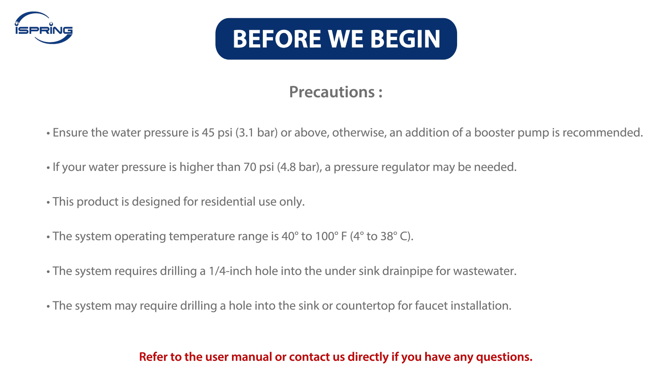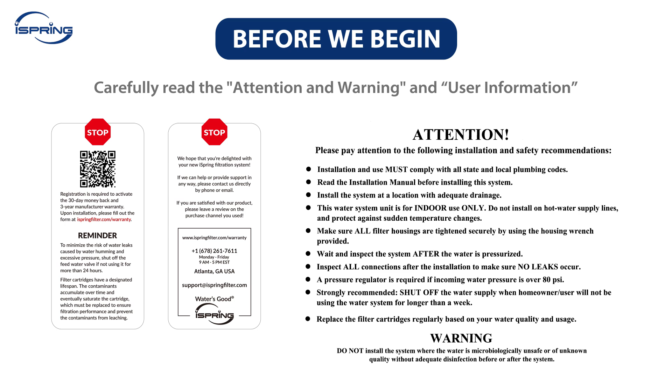The system requires drilling a 1/4-inch hole into the under-sink drain pipe for wastewater. The system may require drilling a hole into the sink or countertop for faucet installation. Carefully read the attention and warning notice on the system packaging and the user information section of the user manual. Check that all parts were included in the package and have all the required tools ready.

Installation: Feed water adapter.

The iSpring RCC series RO systems are designed for under-sink water use. Please clean out the space under the sink before installation. The feed water adapter fits standard 1/2-inch and 3/8-inch connectors. If you have a different size fitting, you will need a converter.

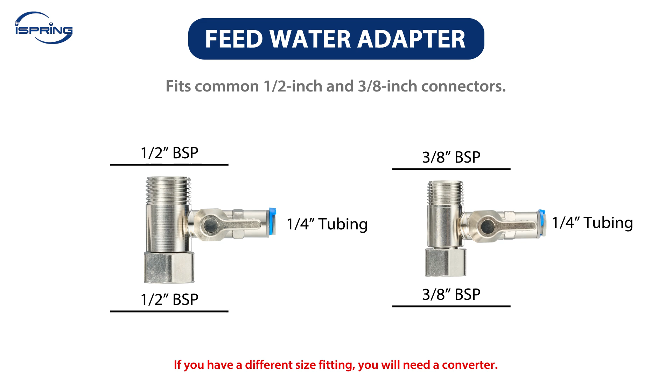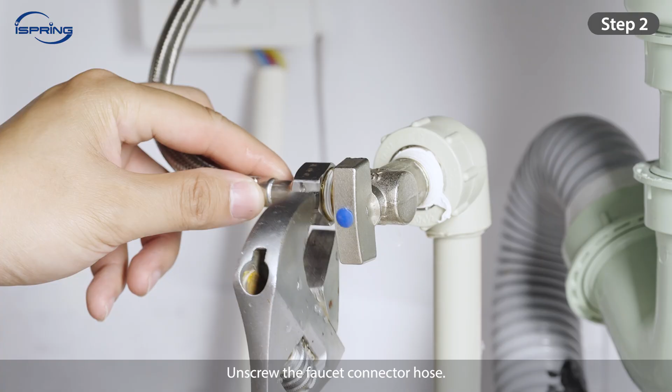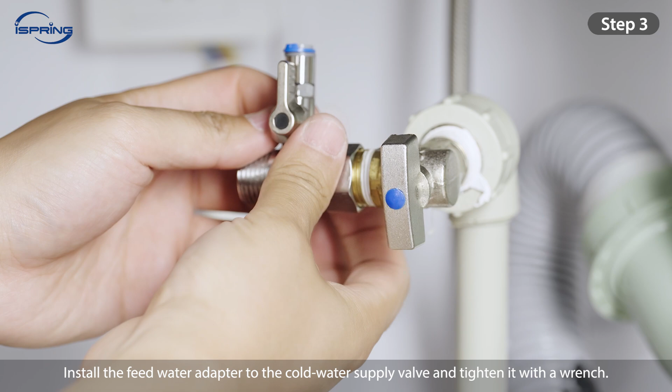Step 1. Turn off the cold water supply valve under the sink and turn on the faucet to drain any air and water in the connector hose. Step 2. Unscrew the faucet connector hose. Be prepared to catch any excess water from the hose with a towel. Step 3. Ensure the O-ring is seated properly inside the adapter to prevent leaks. Install the feed water adapter to the cold water supply valve and tighten it with a wrench.

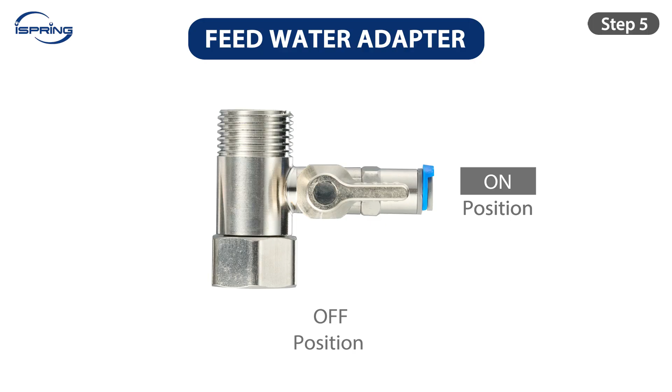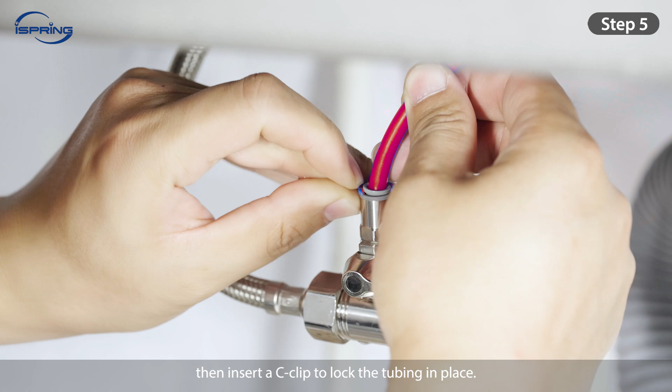Step 4. Reinstall the faucet connector hose to the feed water adapter and tighten it with a wrench. Step 5. Turn the feed water valve to the off position. Insert the red tubing 1/2 inch deep into the quick connect fitting, then insert a C-clip to lock the tubing in place. Measure and cut the tube.

Installation: Drain saddle.

Step 1. Choose a spot on the drain pipe that is convenient for installing the drain saddle and tubing. A horizontal pipe is recommended to minimize the dripping sound.

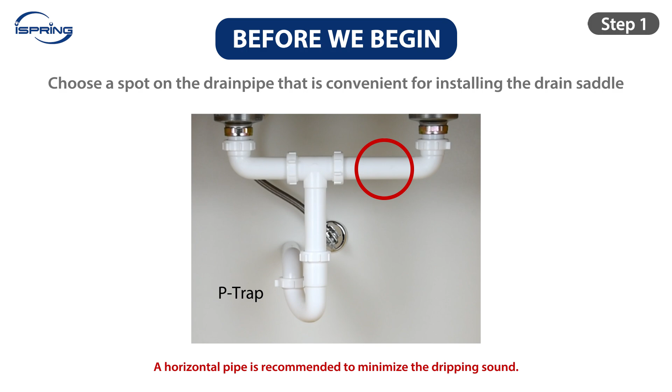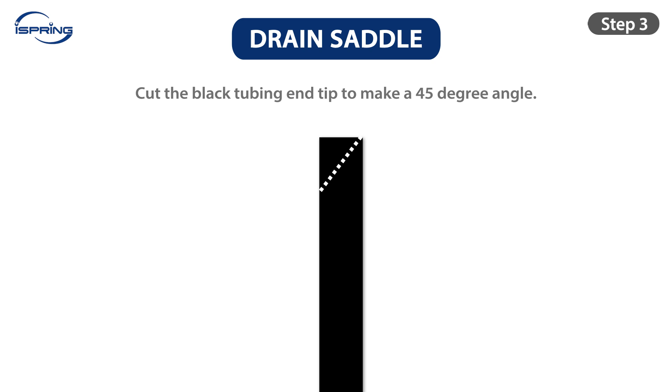Step 2. Drill a 1/4-inch hole into the drain pipe. Paste the seal pad around the hole to prevent leaks. Step 3. Cut the end of the black tubing tip at a 45-degree angle. Insert the tubing through the drain saddle into the drain pipe.

Step 4. Install the back plate and tighten the 2 screws with hex nuts while the tubing remains in the hole. Pull the tubing lightly to make sure it is secure.

Installation: RO drinking faucet. Option 1. Bottom mount kit. Choose a suitable flat surface on the sink or countertop to install the drinking faucet. If your kitchen sink does not have a pre-existing hole, you will need to drill a hole.

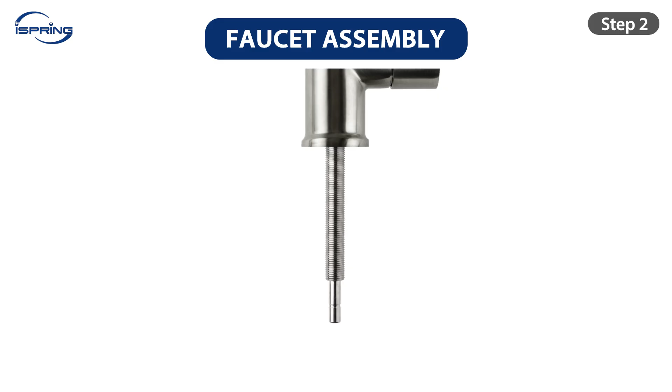1/2 inch to 1.5 inch diameter. Step 1. Clean and dry the sinkhole area. Step 2. Insert the front plate and then the rubber washer into the faucet base. Step 3. Insert the faucet into the sinkhole. Step 4. From under the sink, insert the rubber washer, followed by the wing nut, into the faucet stem. Tighten the wing nut to secure the faucet.

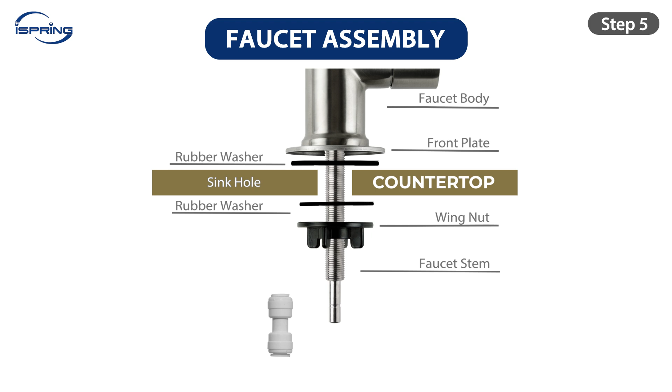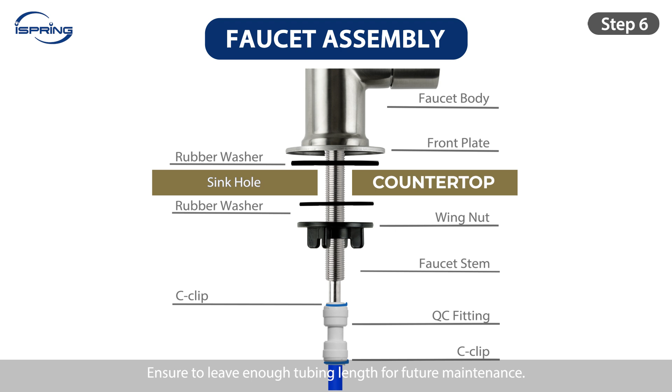Step 5. Insert the blue tubing into the quick connect fitting 1/2 inch deep, then insert a C-clip to secure the tubing in place. Step 6. Connect the quick connect fitting to the faucet stem. Secure the fitting with a C-clip. Measure and cut the tubing. Ensure that you leave enough tubing length for future maintenance.

Installation: RO drinking faucet. Option 2. Top mount kit. A top mount installation kit allows for the installation of a standard drinking faucet on the countertop without the need to reach under the sink. It is designed to save time and hassle. Please note that the top mount kit requires a 3/4 inch to 1 1/4 inch faucet hole.

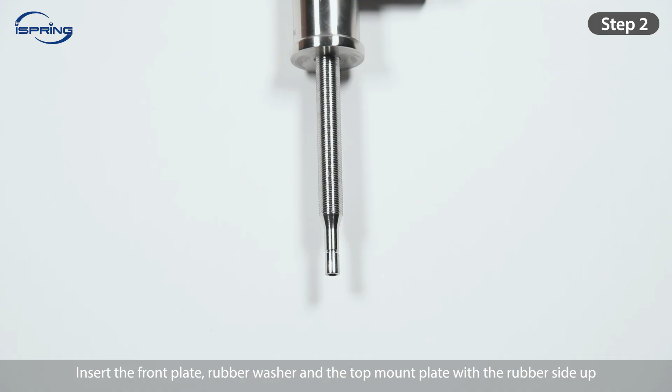Step 1. Clean and dry the area. Step 2. Insert the front plate, the rubber washer, and the top mount plate with the rubber side up into the faucet base. Step 3. Install the metal nut to the faucet stem below the plate.

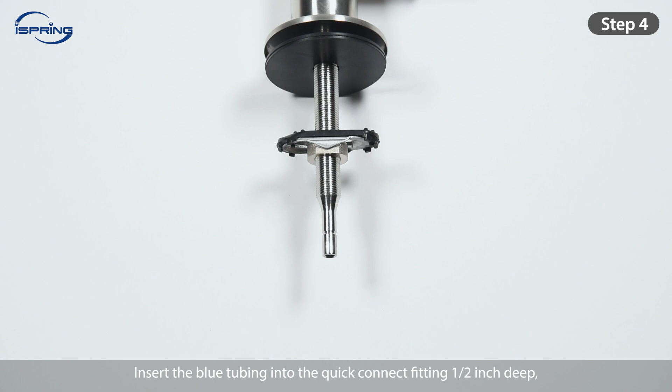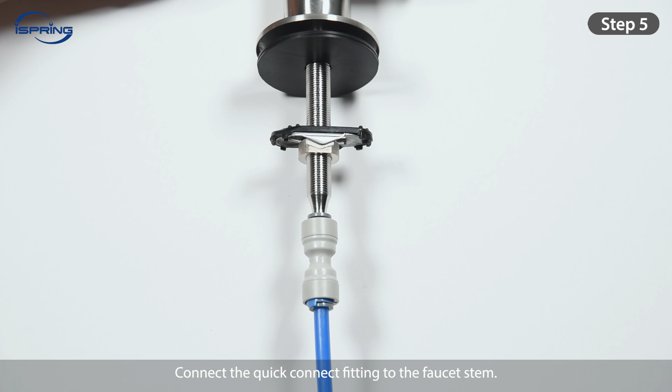Step 4. Insert the blue tubing into the quick connect fitting 1/2 inch deep, then insert a C-clip to secure the tubing in place. Step 5. Connect the quick connect fitting to the faucet stem. Secure the fitting with a C-clip.

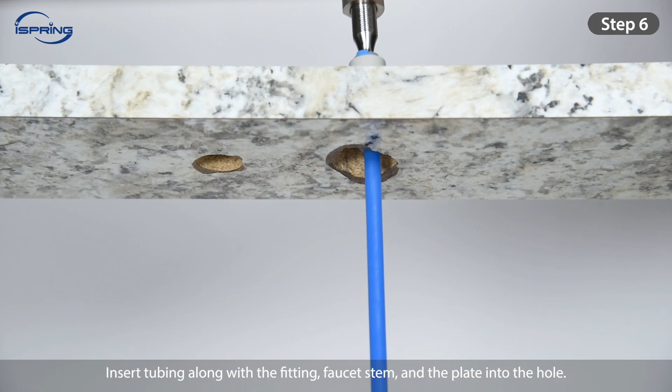Step 6. Lift and tilt the plate. Insert tubing along with the fitting, faucet stem, and plate into the hole. Let go of the plate. It will drop and latch onto the metal nut via the triangular grooves on both sides.

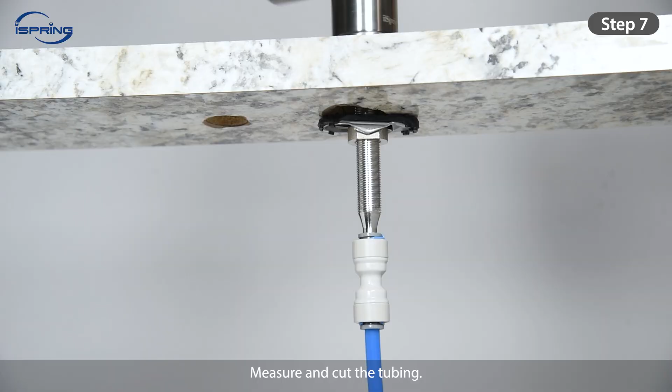Step 7. Lift the faucet body to secure the plate and nut. Tighten the faucet by turning it clockwise. Measure and cut the tubing. Ensure that you leave enough tubing length for future maintenance.

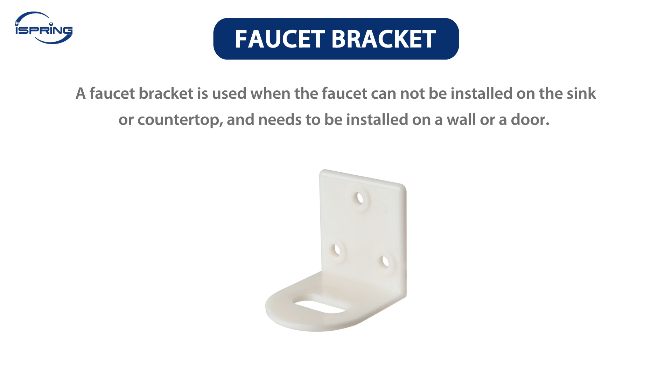Installation: RO drinking faucet. Option 3. Faucet bracket. A faucet bracket is used when the faucet cannot be installed on the sink or countertop and needs to be installed on a wall or a door.

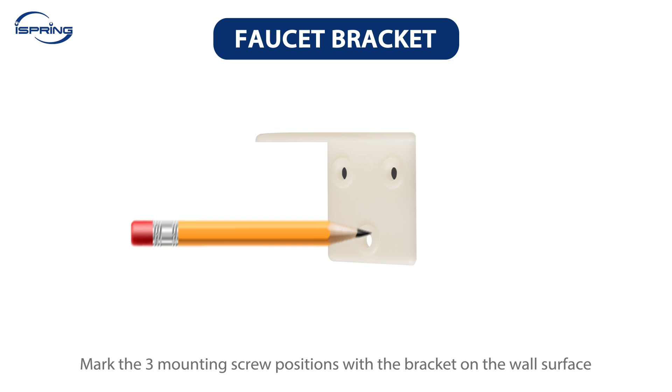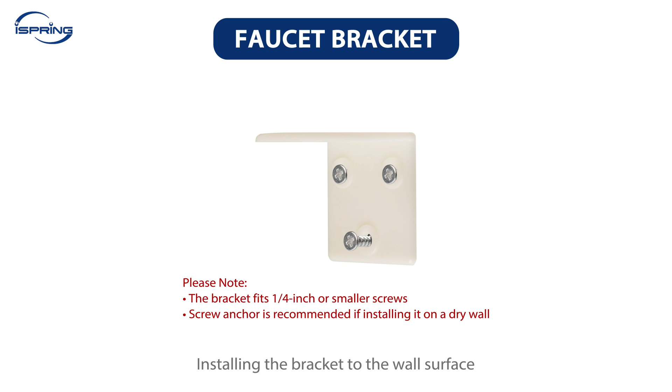To install the bracket, first find the desired location. Then mark the 3 mounting screw positions with the bracket on the wall surface. Pre-drill the marked holes with a smaller drill bit, followed by installing the bracket to the surface with mounting screws. Please note the bracket fits 1/4 inch or smaller screws, and a screw anchor is recommended if installing it on a drywall.

Ensure the bracket is steady and install the faucet to the bracket, followed by the faucet installation instructions.

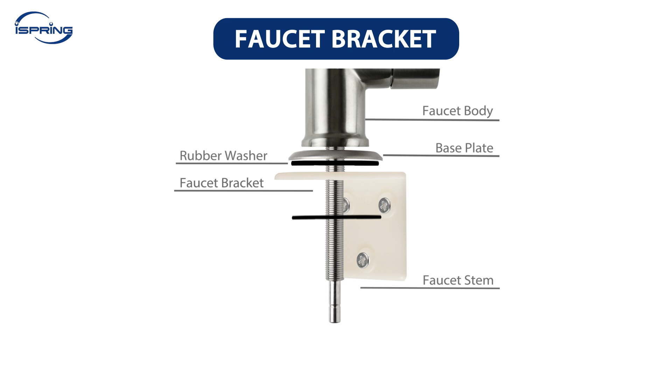Installation: water storage tank.

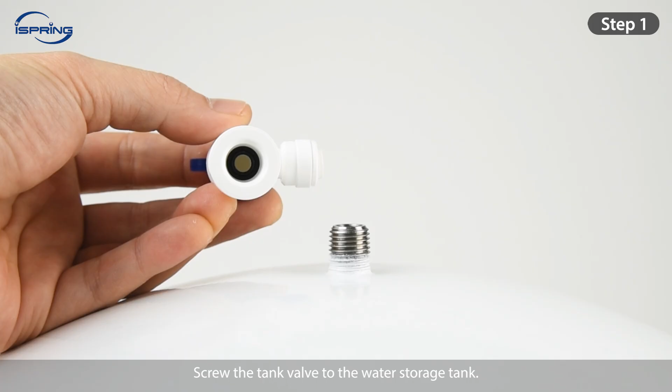Step 1. Screw the tank valve to the water storage tank. Ensure the O-ring is seated correctly inside the tank valve to prevent leaks. Step 2. Insert the yellow tubing 1/2 inch deep into the tank valve. Insert a C-clip to secure the tubing in place. Ensure the tank valve is in the closed position.

Installation: reverse osmosis membrane.

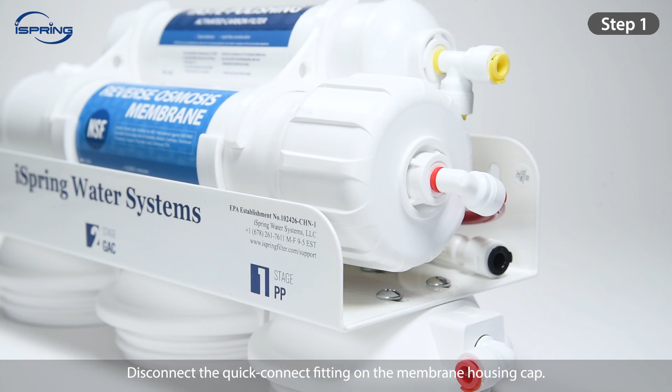Step 1. Disconnect the quick connect fitting on the membrane housing cap. Unscrew the cap by turning it counterclockwise using the housing wrench. All systems have been tested with pressurized water flow to ensure build quality before being packed. It is normal to see a little water residue remaining in the membrane housing.

Step 2. Unwrap and insert the membrane into the housing and make sure the membrane is seated flush with the housing. Step 3. Check that the membrane housing O-ring and housing cap O-ring are seated properly. Screw the cap back onto the housing.

Use the housing wrench to tighten the cap with another 1/4 to 1/2 turn of the wrench. Do not over-tighten, as this can cause leaks and make future filter replacement difficult. Step 4. Connect the push fitting back to the membrane housing cap.

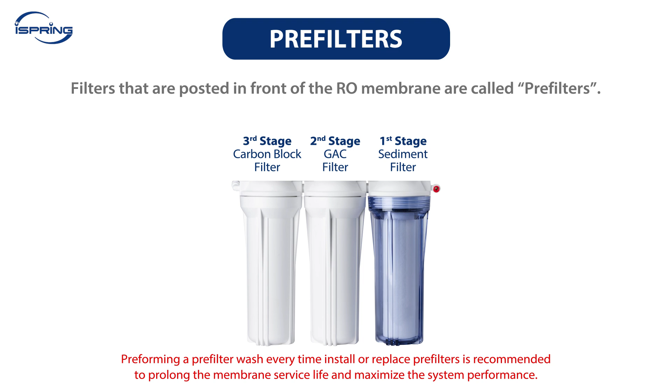Pre-filter wash. Filters posted in front of the reverse osmosis membrane are called pre-filters. We recommend performing a pre-filter wash every time you install or replace pre-filters to prolong the RO membrane service life and maximize the system performance.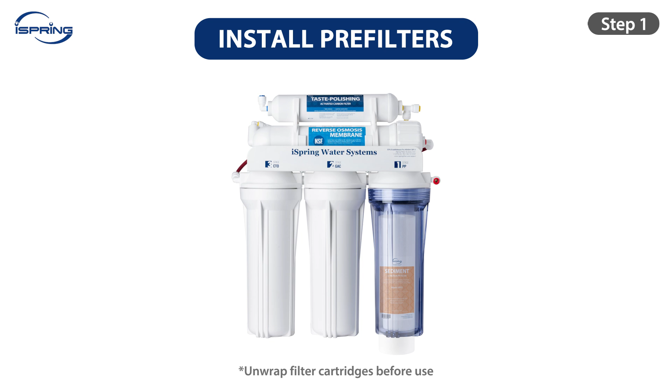Step 1. Unscrew stage 1, 2, and 3 filter housings. Take out and unwrap all the filters. Step 2. Insert the filters back into their housing and ensure the housing O-rings are properly seated to prevent leaks.

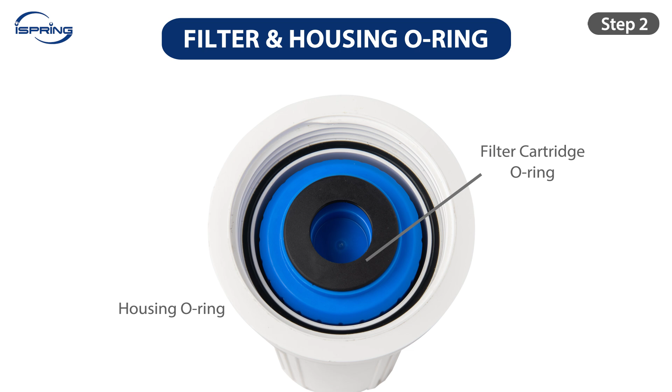Step 3. Twist the housings clockwise onto the housing caps. Use the housing wrench. Tighten the housing with another 1/4 to 1/2 of a turn. Do not over-tighten, as this can cause leaks and make future filter replacement difficult.

Step 4. Remove the C-clip and insert the red tubing from the feed water adapter to the system water inlet fitting. Lock the tubing in place by inserting the C-clip.

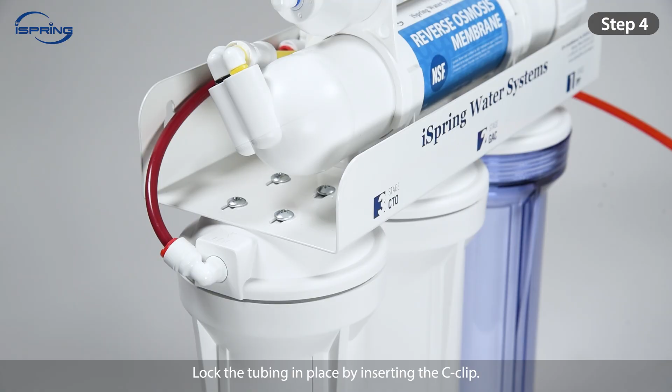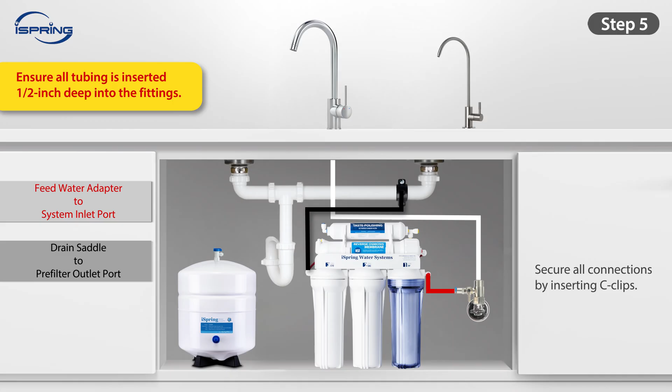Step 5. Remove the C-clip and remove the red tubing from the pre-filter water outlet. Insert the black tubing from the drain saddle to the pre-filter water outlet fitting. Ensure all tubing is inserted 1/2 inch deep into the fittings to prevent leaks.

Step 6. Turn on the cold water supply valve and slowly turn on the feed water valve. Let the water fill and flush the pre-filters for at least 5 minutes. Check and ensure that no leaks occur.

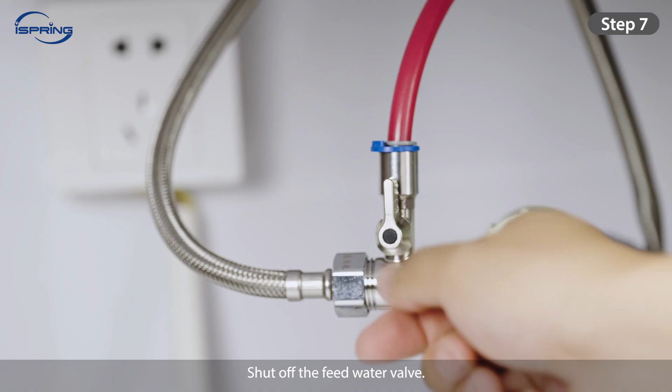Step 7. Shut off the feed water valve. The pre-filter wash is now complete.

Installation: leak stop valve. RCC series comes with a leak stop valve that can automatically shut off the inlet water from entering the water system when it detects a leak, effectively protecting your home from water damage.

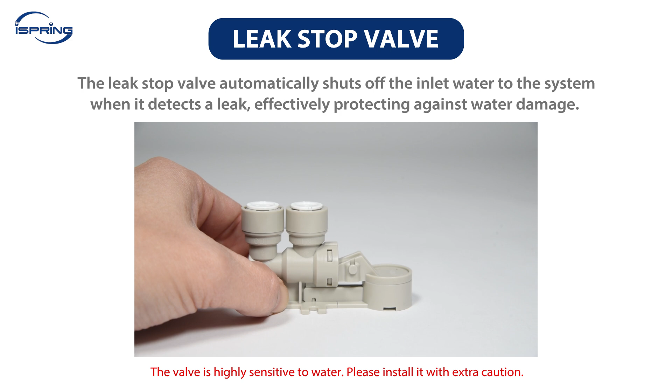The valve is highly sensitive to water. Install it with extra caution, as the leak stop pad inside the valve will easily absorb water and expand. Thus, it will need to be replaced every time it contacts with water.

Step 1. Find a dry and flat spot under the sink close to the system to place the leak stop valve. Step 2. Measure and cut the red tubing. Connect the red tubing from the feed water valve to the leak stop valve's inlet port.

Step 3. Connect the remaining red tubing from the system inlet to the leak stop valve's outlet port. Please ensure all tubes are inserted half an inch deep into the fittings.

System installation.

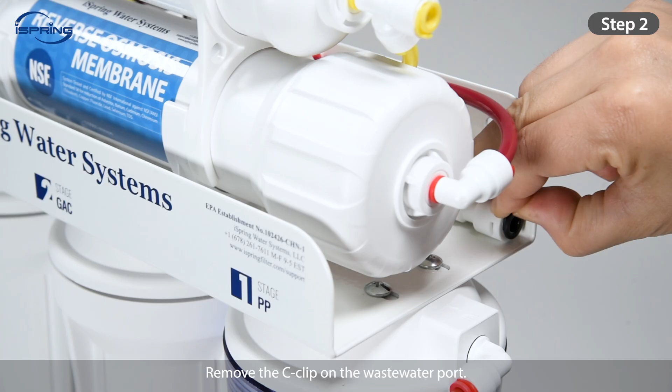Step 1. Remove the black tubing from the pre-filter water outlet fitting. Be prepared to catch the excess water from the connection with a towel. Step 2. Remove the C-clip on the wastewater port.

Connect the black tubing from the drain saddle to the system wastewater port. Insert a C-clip to secure the tubing in place.

Step 3. Connect the red tubing back to the pre-filter water outlet fitting. Insert a C-clip to secure the tubing in place.

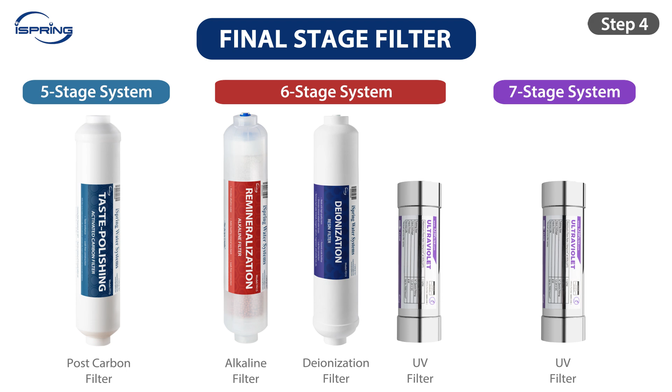Step 4. Connect the blue tubing from the drinking faucet to the final stage of your system. The final stage filter will be a post-carbon filter if you have a 5-stage system, an alkaline filter, a deionization filter, or a UV filter if you have a 6 or 7-stage system. Insert a C-clip to secure the tubing in place.

Step 5. Connect the yellow tubing from the water storage tank valve to the post-carbon filter's T-fitting. Insert a C-clip to secure the tubing in place.

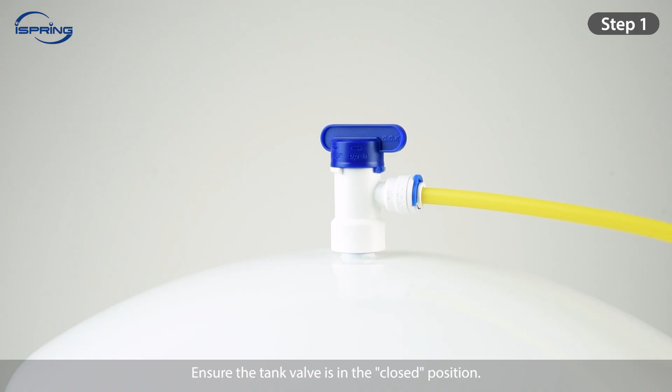Step 1. Ensure the tank valve is in the closed position. Turn on the feed water valve and check the connections for any leaks. Turn off the feed water valve and fix any leaks before moving on to the next step.

Step 2. Turn on the drinking faucet to purge out all the air. The water will start to trickle within a few minutes. Step 3. Let the water trickle for at least 10 minutes to drain any residual materials from the membrane and filters.

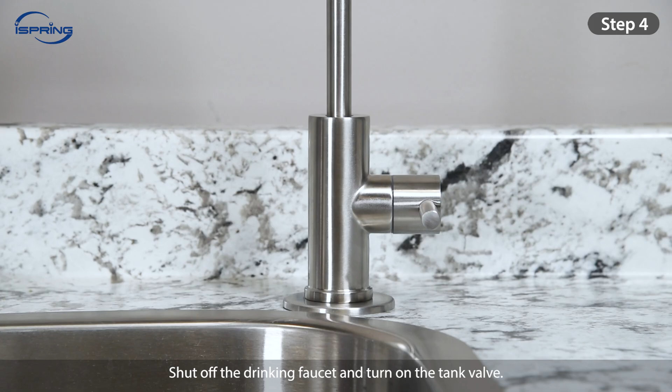Step 4. Shut off the drinking faucet and turn on the tank valve. The water storage tank will now fill up. The water storage tank usually takes 1 to 2 hours to fill, depending on your water pressure and temperature.

Step 5. Do not use the first tank of water after it is full. We recommend draining out the tank twice before drinking any water. Turn on the drinking faucet to drain out the tank completely. When the tank is completely drained, the stream of water will slow to a trickle.

Step 6. Shut off the drinking faucet to allow the tank to fill again for another 1 to 2 hours. Step 7. Turn on the drinking faucet to completely drain the tank again. Step 8. Shut off the drinking faucet to allow the tank to fill again. Once the tank is full, your system is ready for use.

Congratulations! Your iSpring reverse osmosis system installation is now complete. You can now enjoy clean and refreshing water from home. Please refer to the user manual or contact us directly if you have any questions. Thank you.